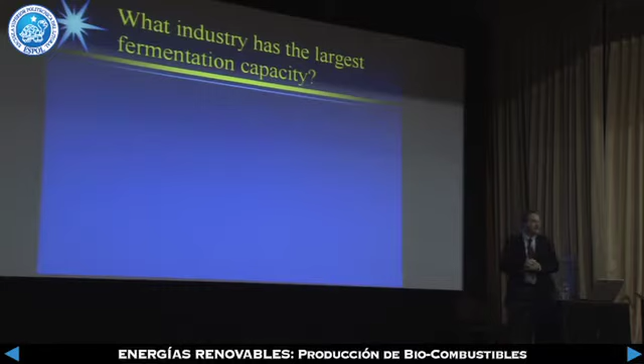What industry has the largest fermentation capacity? Is it pharmaceuticals, wine, beer, or wastewater treatment? Any ideas? Well, no, it's wastewater treatment. The beer has to go someplace, right? You have to process it someplace.

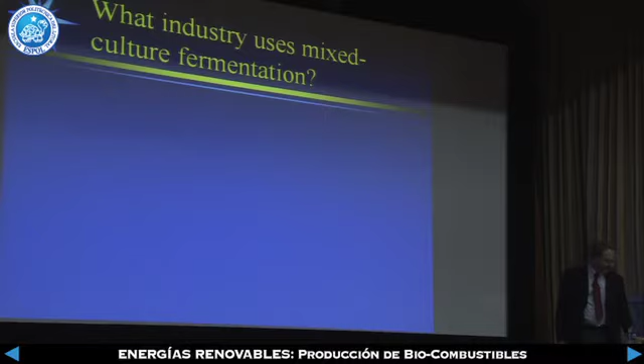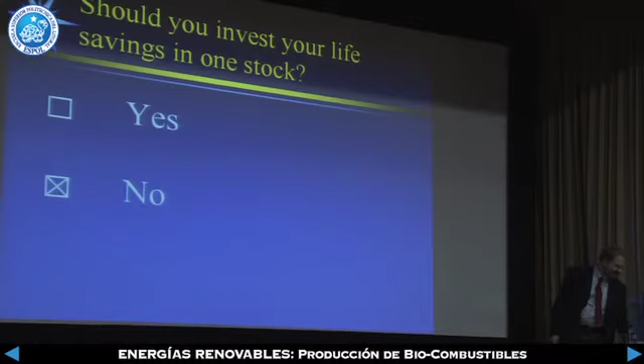Okay, what industry uses a mixed culture fermentation, meaning many organisms working together? Pharmaceuticals, wine, beer, or wastewater? Wastewater, very good. Would you employ a monoculture to treat waste, meaning a single organism? No. Should farmers employ monocropping, meaning they grow only one crop? No, that's not good. And should you invest all your life savings in a single stock? That doesn't sound like a good idea, right? So the conclusion from this test is that diversity is a good thing.

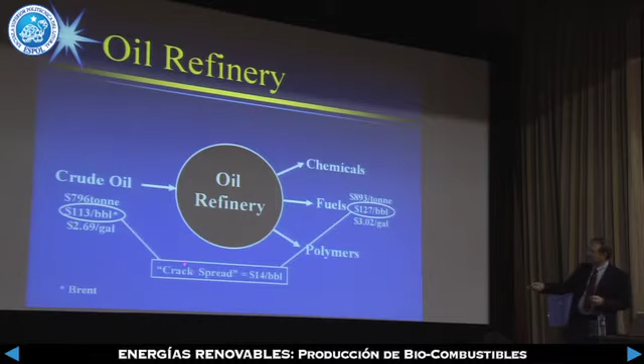So what I'm going to do is start by teaching you about how crude oil is processed into refined products. The cost of crude oil currently is about $113 per barrel, and refined products are about $127 per barrel. And the difference in price is the crack spread, which is only about $14 per barrel.

Now, if we have biomass at $60 a ton, on an energy basis, that's equivalent to oil at $20 a barrel, and the refined products would, of course, have the same value. So now we have a crack spread of about $107. So there's an opportunity to make money here if you can figure out what process goes into that circle.

So I'm going to give you a mini course on biofuels. There are 4 different feedstocks that people consider, and there are a number of liquid fuels that can be produced. And always you have to go through an intermediate. It's impossible to go directly from the biomass to the liquid fuel in a single step. And we have some processes that are chemical in nature and some that are biological in nature.

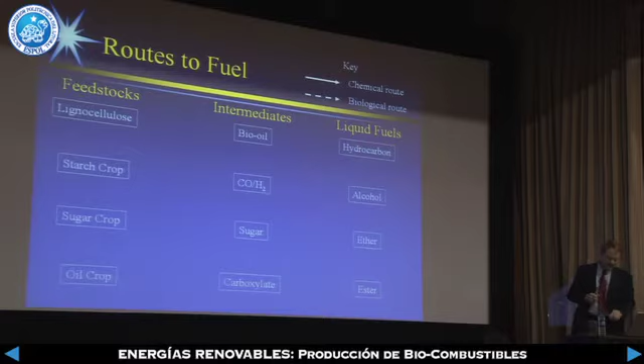So let's start something that could be done in Ecuador. We would extract the oil from oil crops such as palm and react that with methanol to make the ester that's commonly called biodiesel.

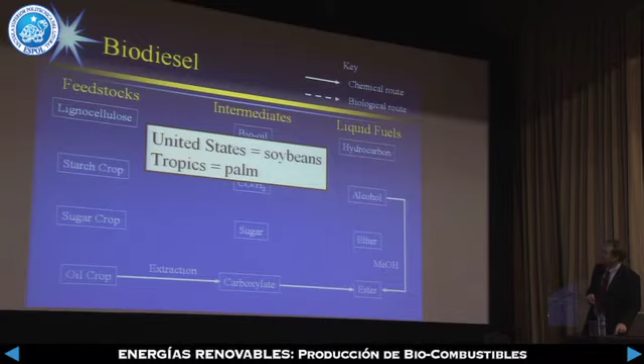In Brazil, they take sugar cane and extract the sugar, which is fermented to make ethanol. In the United States, we use corn to convert that to sugar and ferment that to alcohol.

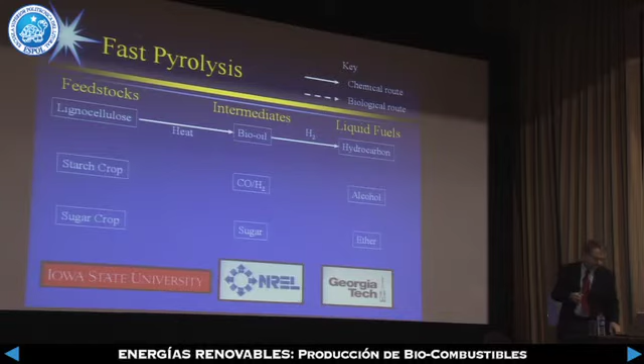And we could also heat the biomass very rapidly to make a bio-oil, which is then hydrogenated and upgraded to hydrocarbon. Or we could partially burn the biomass to make synthesis gas, carbon monoxide and hydrogen, which can then be catalytically transformed into various liquid fuels.

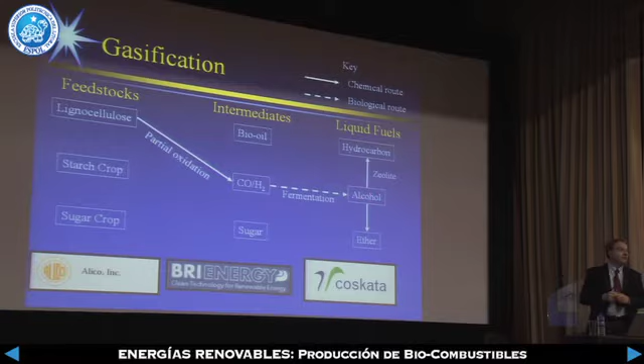Or we can ferment carbon monoxide and hydrogen to alcohol. Believe it or not, there are microorganisms that will eat carbon monoxide and hydrogen.

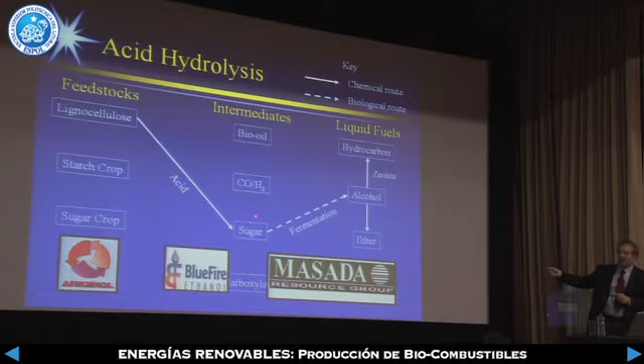If you take acids and treat lignocellulose with acid, you make sugar, and the sugar can be fermented into alcohol, or we can use enzymes that transform the biomass into sugar and ferment that. Many companies are pursuing that technology.

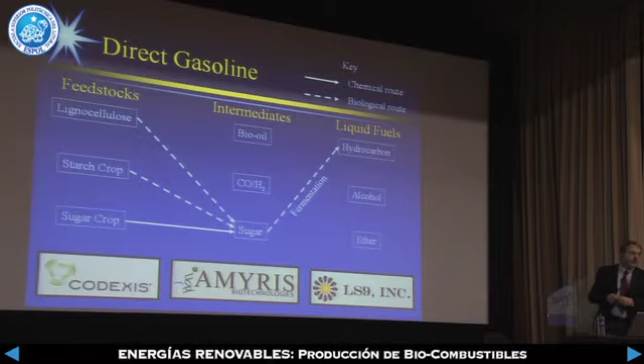Or you can directly convert the sugar into hydrocarbons. These companies believe that they can do that. Or there are chemical routes to transform sugar into hydrocarbons.

Now, the technology that we are employing is to take the lignocellulose using a mixed acid fermentation, make carboxylates, and then from there we use chemistry to make a variety of products.

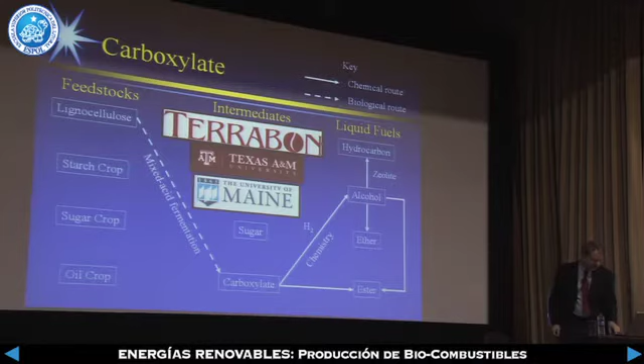Now, all these various feedstocks, the only one that has enough quantity to be of interest is lignocellulose. And the two most common platforms are the thermochemical platform, where you make synthesis gas, and the sugar platform, where you transform the biomass into sugar.

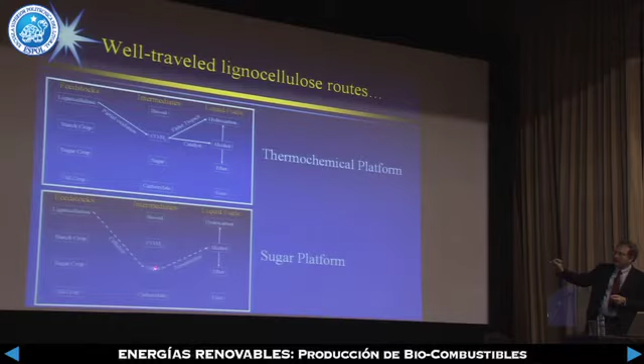Our technology is a road less traveled. We are essentially the only research group in the entire world that is pursuing this technology.

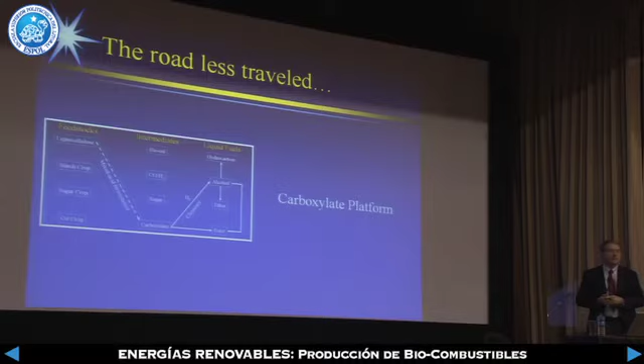So what I would like to do is compare these three different possibilities using a common basis. I'm going to create something called balanced biomass, which is about 68% sugars and 32% lignin. Lignin is the glue that holds biomass together.

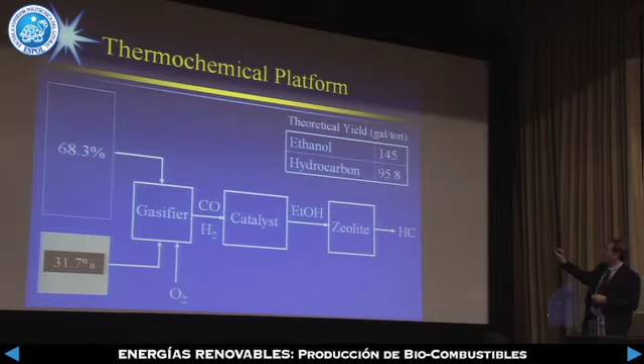So if we use the thermochemical route, both the sugar and the lignin are reacted with oxygen to make synthesis gas, and then we can catalytically transform that into alcohol or hydrocarbons. Here you see the theoretical yield.

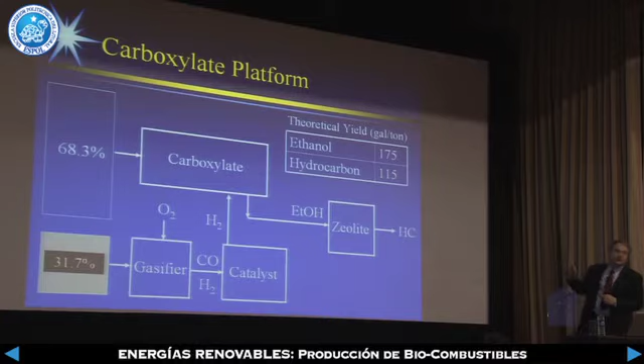So if we compare these theoretical yields, you see that the thermochemical platform has lower yields, whereas the two biological routes have higher yields. The reason the thermochemical is lower is because you are partially burning the biomass. The sugars are burned, so you don't have as much energy available to make into liquid fuels.

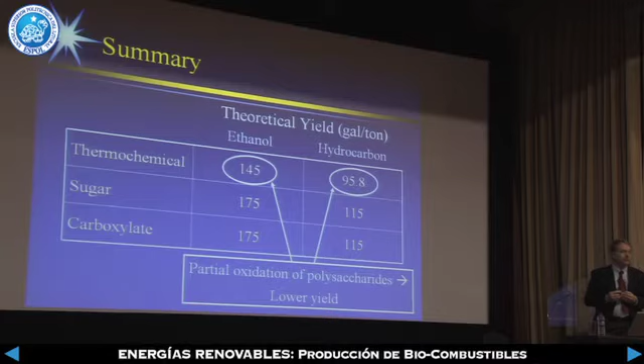If we look at the catalytic step in the thermochemical platform, they're trying to transform synthesis gas into liquids, which is very difficult. If you try to transform synthesis gas into hydrogen, that's done in every oil refinery in the world—it's a very easy technology. That's called the shift process, and that's what we're trying to employ in our process.

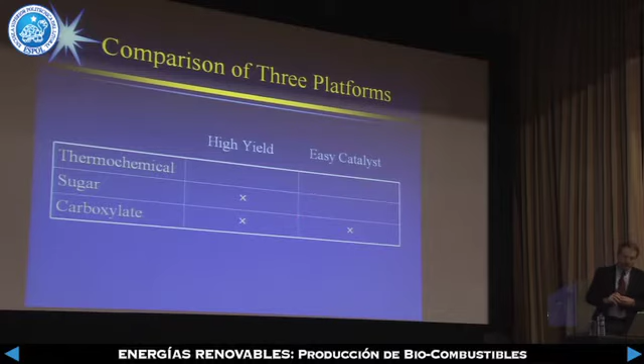So if we complete our comparison, in my opinion, the thermochemical route has no advantages. The sugar platform has one advantage, but the carboxylate platform has two advantages. For this reason, I think it is worth further investigation. In fact, I have devoted my academic career to understanding and moving this technology forward.

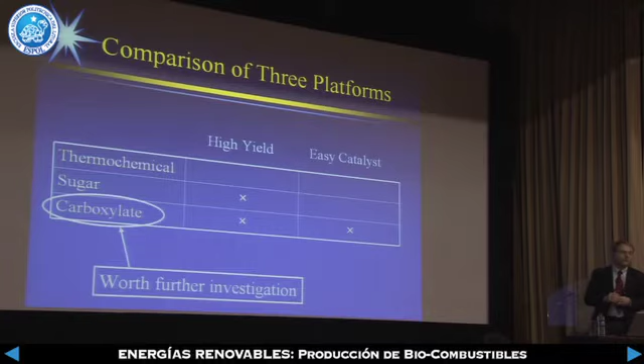So with that as background, finally the title of my presentation: I'm going to introduce you to the Mixalco process, which is the embodiment of the carboxylate platform.

The first thing we do is take the biomass and treat it with lime. Here I have to tell a little story. Some years ago, I had the opportunity to speak in Mexico, and it was a similar situation where we had a translator translating into Spanish. But the translator was not technical, so when I talked about treating biomass with lime, she translated it as 'limón.' The group laughed—I believe the proper word is 'cal.' So I'm sure you know the proper word is cal.

So we treat the biomass with cal and directly ferment the biomass into carboxylate salts. We then remove the water and transform the salts into ketones by heat. We hydrogenate the ketones to make alcohols, and then we transform the alcohols into hydrocarbon fuels.

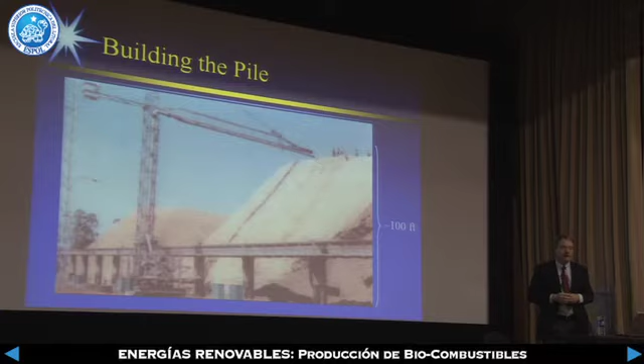So this is a photograph from Argentina. This is sugarcane bagasse in a pile, and you can see people on top—we're estimating that to be about 100 feet, or 30 meters, in height. The way they build that pile is with an aqueous slurry of the biomass and water; the liquid drains away and the solids accumulate and build the pile.

Now the important thing is to remove the lignin. What I'm showing is the lignin content on this axis and time on this axis. In some cases there was no air; in others we did have air, and we varied the temperature. Bagasse has about 24% lignin, and in just a matter of a few days it dropped to about 17%, then nothing more happens. But in the presence of air, the lignin content keeps dropping and dropping and dropping. In fact, we made paper from this material—it had such a low lignin content.

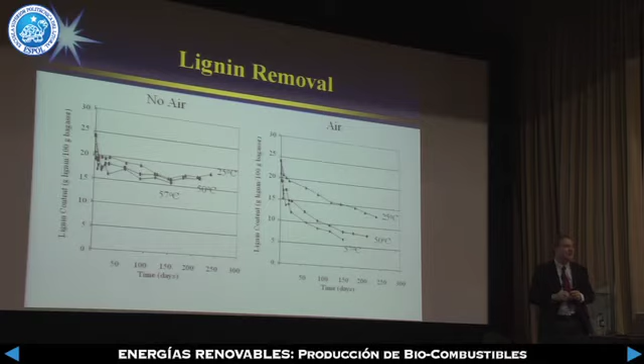Now, I'd like to brag about these data. They were generated by Cesar Granda, who's an Ecuadorian student that worked with me for many, many years. I will refer to Cesar multiple times through the presentation because he's played such an important role in my research.

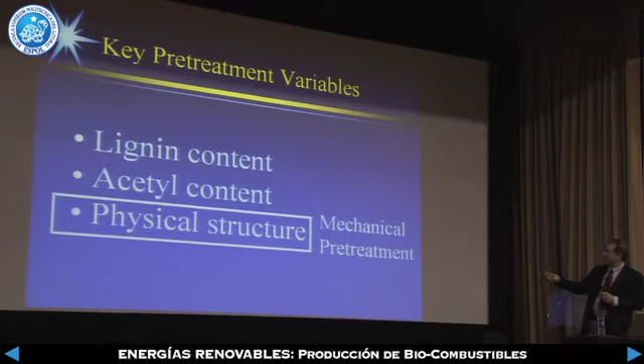The other issue we must deal with is the physical structure, which requires mechanical treatment. The classic way of doing this is with a ball mill. We have steel balls that tumble and rotate and pound against the biomass, making it very digestible.

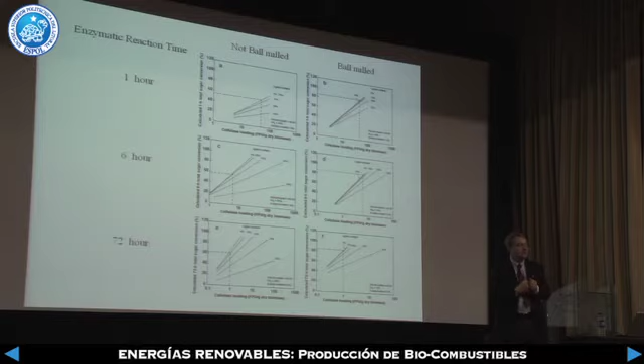What I'm showing here is using enzymes to break down the biomass. All this data is without ball milling, and all this data is with ball milling. We're looking at how much sugar can you make in 1 hour, 6 hours, and 72 hours, and this is the amount of enzyme being added. So if there's no ball milling, I can achieve 55% digestion, but with ball milling I achieve 85%. We see that same pattern: in 6 hours I can get to 55%, 85%, 60%, 85%. So the mechanical treatment greatly increases the digestibility of the biomass.

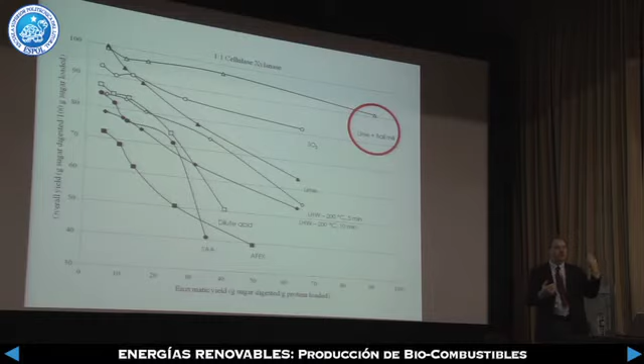What I'm showing here is on this axis, how much sugar you get per unit of sugar in the biomass, and on this axis, how much sugar you get per unit of protein added. The enzymes are made of protein, and they're very expensive. So we want the highest yield of sugar per unit of biomass and the highest yield per unit of protein, which means you want to be in this region. Each of these represents various pretreatments that have been explored, and the one that works best is the combination of lime plus ball milling. So this shows how effective the combination of a chemical and mechanical treatment is.

There's a problem, though. Ball milling is very expensive. Just the electricity required to run the ball mill will cost you $430 per ton of biomass.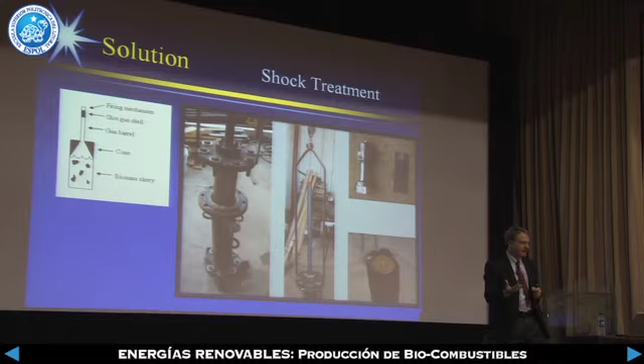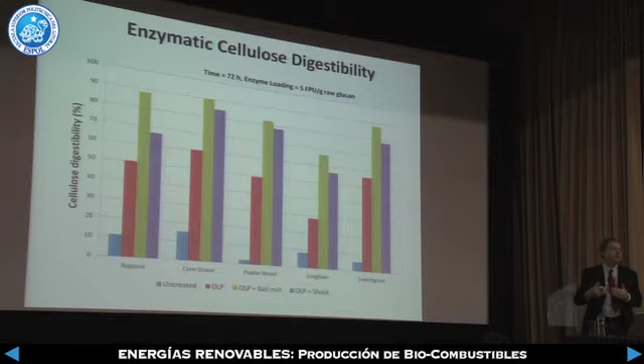Here I'm showing 5 different kinds of biomass. On the left is untreated material. The red is oxidative lime pretreatment, just lime and air. This is the ball milling, and then this is the shock. What you see is that the shock treatment does the best, better than ball milling in a 24-hour period. Now, when we go to 72 hours, the ball milling is slightly better, but not dramatically better, and I certainly cannot afford to pay $400 per ton just for that little bit of improvement.

These data I find are very, very exciting, and let me see if I can explain what's going on here. This is the rumen of a cow, the first stomach of a cow. Shown on this axis is the amount of digestion, and on this axis is the amount of time. Now, in the United States, we feed cattle corn to fatten them up before we eat them, and this is how well corn does in the rumen. Notice in 24 hours, it's about 80% digested, and that's why cattle like to eat corn. It's very digestible; they can gain a lot of weight.

Another thing we feed cattle is alfalfa, a grass with high protein content, and in 24 hours it's about 55% digested, so it's very digestible. Now, if you feed cattle corn stover — every part of the corn plant but not the grain, so the leaves, stems, husk, and cob — you see in 24 hours it's only about 30% digested. However, if we shock and lime treat the corn stover, in 24 hours it's about 65% digested. So it's more digestible than the alfalfa, which is very expensive, and almost as digestible as the corn grain, which is also very expensive. So we can take a waste material, corn stover, that has very little value, and by going through this process, make it almost as valuable as the corn grain itself.

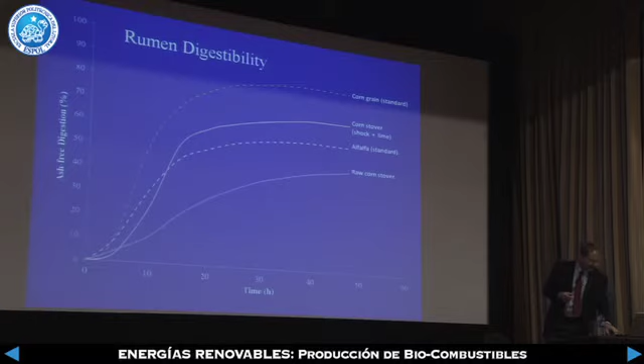Okay, let's talk about the fermentation. Essentially what I'm trying to do is make a giant cow — I want to make the rumen of the cow grande.

So these are places where organic acids form. I've talked about the rumen, sewage digesters, swamps, and termite guts.

Now, why does nature favor organic acids? If glucose, the sugar in the biomass, is converted to ethanol, the Gibbs free energy is about 48 kilocalories per mole. But if you transform the glucose into acetic acid or vinegar, the Gibbs energy change is 62 kilocalories per mole. So these organisms want as much energy as they can from the biomass.

Now this is a little bit simplistic. In addition to acetic, propionic, and butyric acid, you can get some methane and some hydrogen. For our purposes, methane is not a desired product, so we put an inhibitor there that suppresses the methane formation.

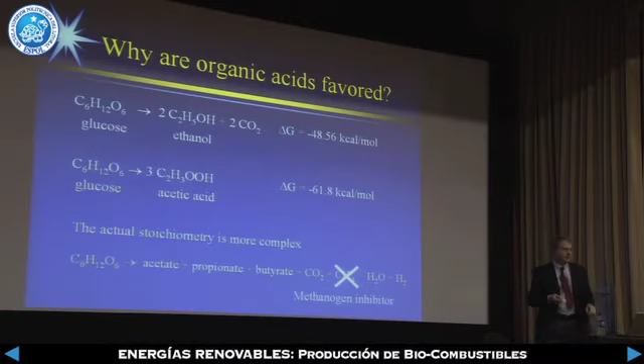This shows the composition of the acids at 2 different temperatures. 40 degrees Celsius is the temperature of a cow, and 55 is the thermophilic condition. Notice that at 40 degrees, it's only about 41% acetic acid, but you get these higher molecular weight acids. When you go to elevated temperatures, you eliminate the higher acids and emphasize the acetic acid.

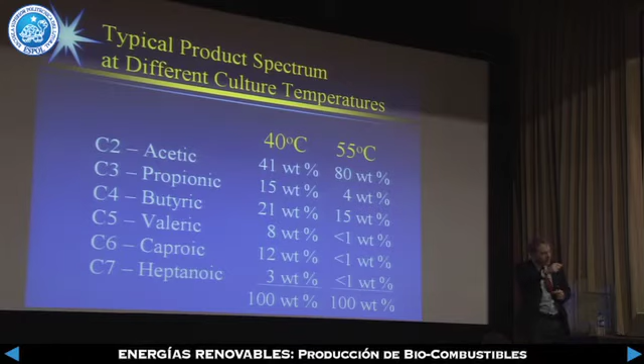So this is a very simple control variable that you can use to adjust the spectrum of acids that you get from your fermentation. So if you're trying to make acetic acid, which is a valuable chemical, you could operate at elevated temperatures. If you're trying to make fuels where these are more valuable, then you lower the temperature. So you can adjust the fermentation to give you the product spectrum that you're looking for.

Next, we'll talk about the dewatering step. This is my favorite way to do the dewatering. We have the salt solution, the fermentation broth, coming into a heat exchanger. On this side of the heat exchanger, we have boiling brine water, the boiling salt water. And on this side, we have condensing steam.

So what happens is we bring the salt water in here. In this example, I'm going to use 100 degrees Celsius. The pressure is 1 atmosphere. We take that steam, which has no salt, bring it to a compressor where we elevate the pressure to 1.04 atmospheres. Now the steam will condense at 101 degrees. So this side is 101 degrees, this side is 100 degrees. Heat will flow from the hotter to the colder, and when it does, the steam condenses, comes off as liquid, and that heat then boils more water, and so we generate more steam.

So this energy is going around and around and around, and what drives that energy is the small amount of work that's invested in that compressor.

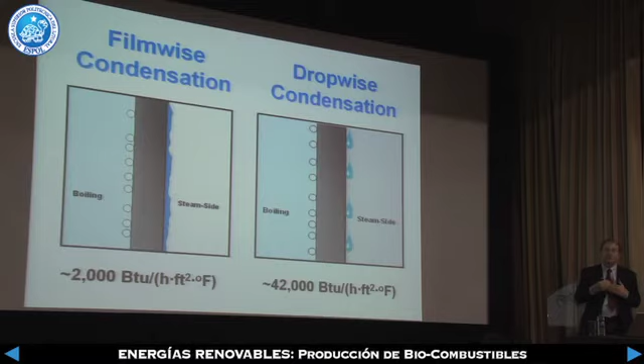This has an enormous impact on making this process very efficient.

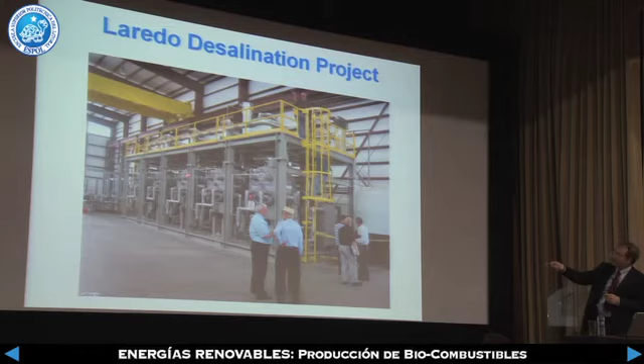We've actually piloted this technology. This is a water desalination facility for the city of Laredo, Texas. These are the heat exchangers right here, and up on the upper deck is the compressor, which is shown here. This machine can process 50,000 gallons of water per day. In fact, it could do about 5 times more than that. It has much more capacity than what we used.

Okay, now we have the salts. We're going to heat them to form ketones. And the chemistry is shown here. These are the salts, in this case calcium acetate, the propionate and butyrate. We heat them and to form acetone and calcium carbonate. So the calcium comes out in the form of calcium carbonate, and the organic molecules come out in the form of ketones, in this case acetone, diethyl ketone, and dipropyl ketone.

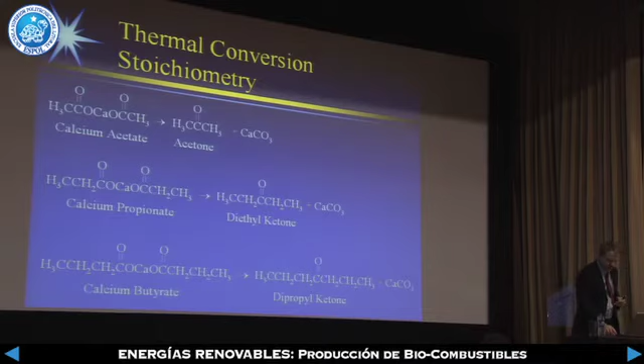I won't go into much detail here other than to say this is the reactor where we make the transformation of the salts into the ketones, which are collected here as a liquid.

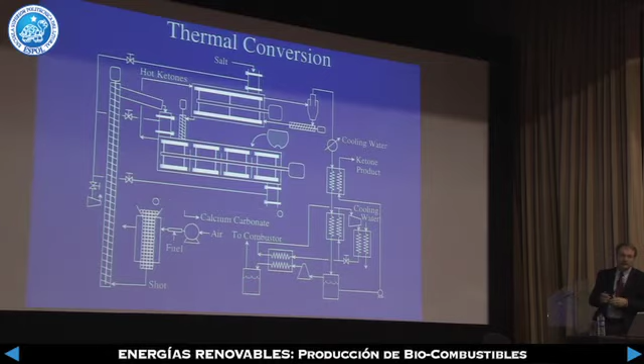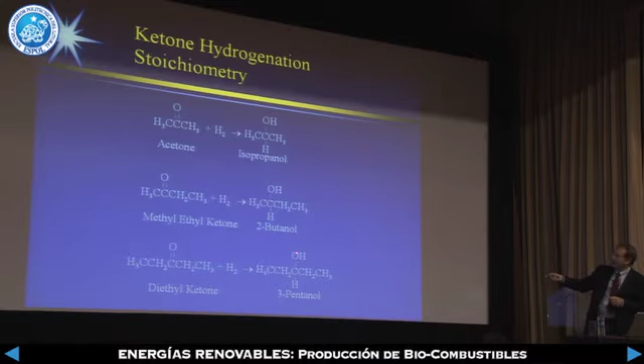Now that we have liquid ketones, we're going to add hydrogen to make alcohols. Here you see the chemistry: the ketone groups are hydrogenated to form alcohol groups. This can be done in a liquid phase using a Raney nickel catalyst, a very simple process. Our computer models propose that we do a 3-stage hydrogenation.

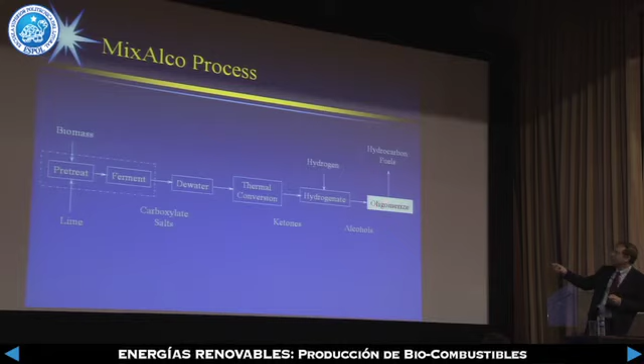Finally, after we have the alcohols, we go through a process called oligomerization to make hydrocarbon fuels. This chemistry is a little more complicated. The first step is to split out the water, which leaves a double bond. That double bond is very reactive, and it will react with other double bonds and grow, or oligomerize, into a larger molecule. So here we joined 2 3-carbon molecules to make 1 6-carbon molecule. If we want to, we can saturate that double bond by adding more hydrogen. So what I've done is taken an alcohol and made a hydrocarbon. In this case, that molecular weight would go into gasoline.

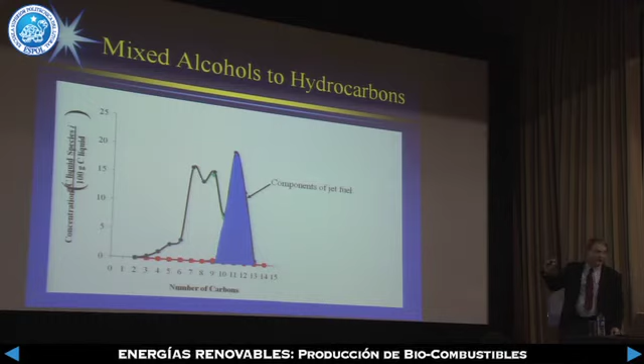This shows the composition of the hydrocarbons, the carbon number. These components here go into jet fuel, and these components go into gasoline.

What are the advantages of our technology? We can use wet feedstocks, so you can go directly from the field to the factory. We can use a wide range of feedstocks, and I'm going to spend a little time on this. Here I'm showing a tree going into our process, but there are many, many other things that can go into the process.

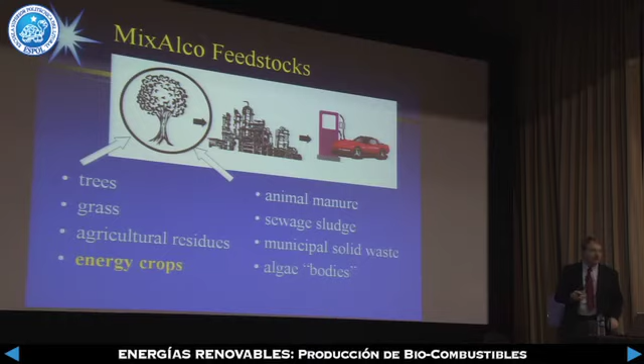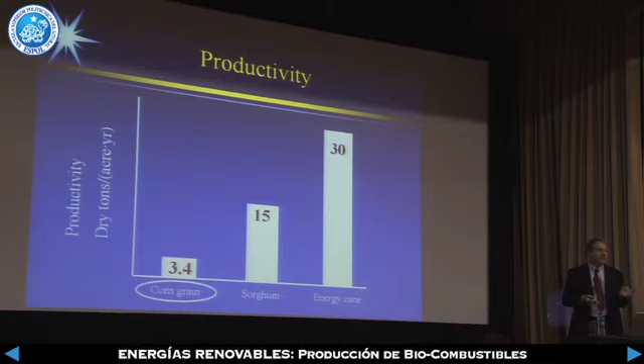Let me talk about energy crops. In the United States, we grow corn as an energy crop. You can see the yield in dry tons per acre per year. In the United States, we measure land by acres rather than hectares. It's about 2.5 times smaller than a hectare.

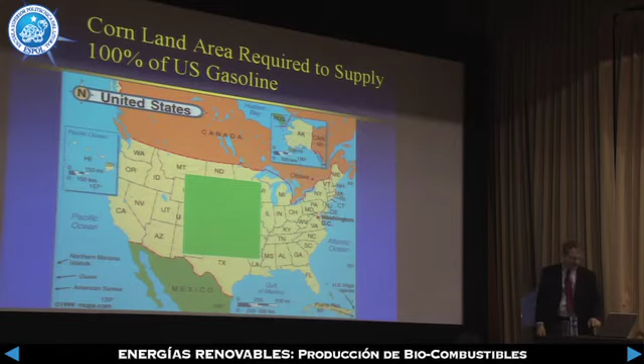So if the United States says we're going to replace all of US gasoline with corn, that amount of land would have to be planted. I don't think anybody here believes that's a practical solution to the fuel problems. Plus, we have a moral dilemma of food versus fuel.

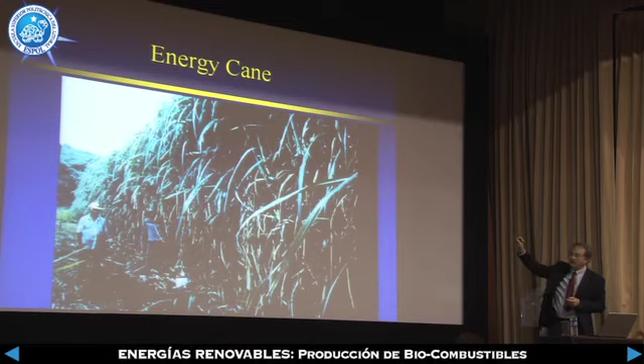Or we can use a crop called energy cane, which is even more productive. This is a photograph of energy cane taken in Puerto Rico. Here you see 2 adult males next to 1 year's growth. You can see it harvested here.

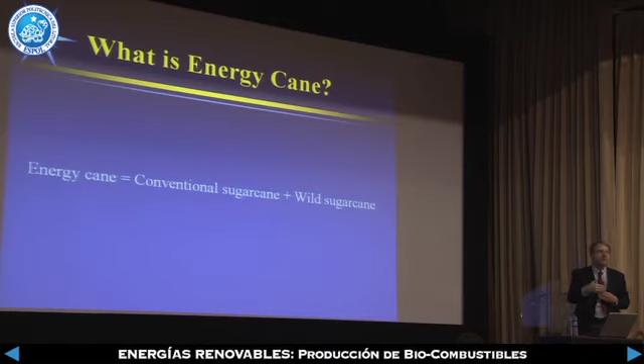Now, what is energy cane? It's a cross between conventional sugar cane and wild sugar cane. Conventional sugar cane is bred to have a high concentration of sugar, where wild sugar cane just wants to grow. So if you take the genes from both, you get a very productive crop that also makes sugar. Let me use this to illustrate that.

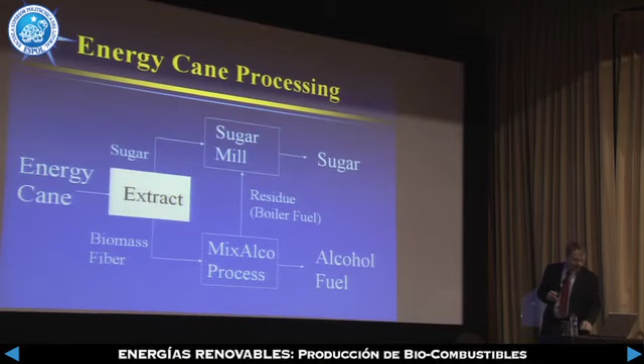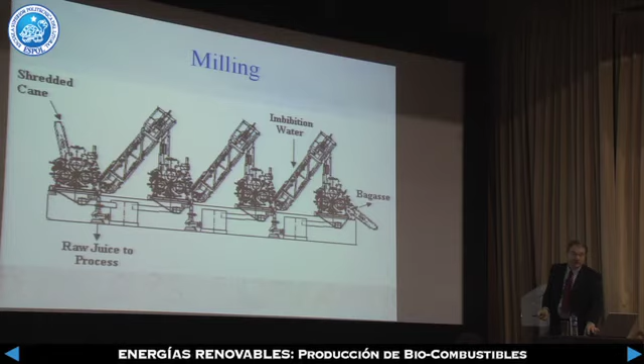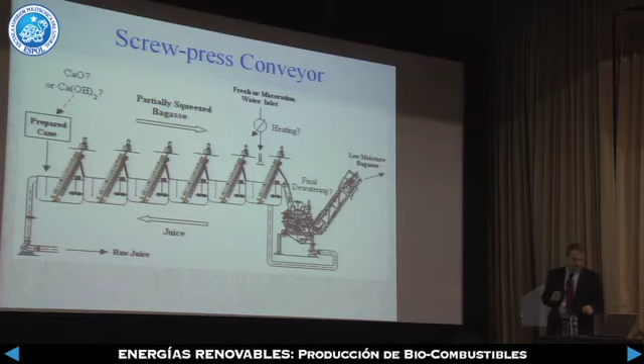What we're proposing is a screw press conveyor shown here between each of the stages. You bring the cane in, it goes this way, and the water that washes out the sugar goes the opposite direction. This shows the number of stages: for milling you need 4 to 5 stages, for diffusion about 18 stages, but the screw press conveyor is about 8, so it's in between.

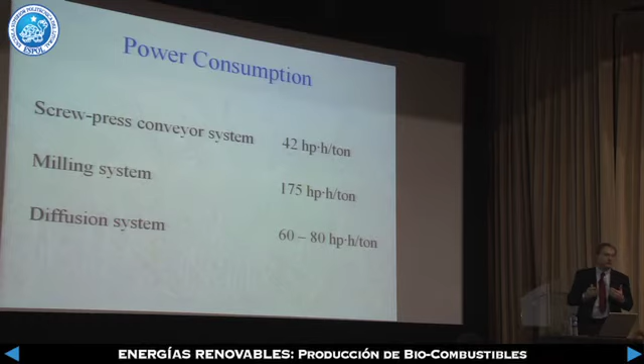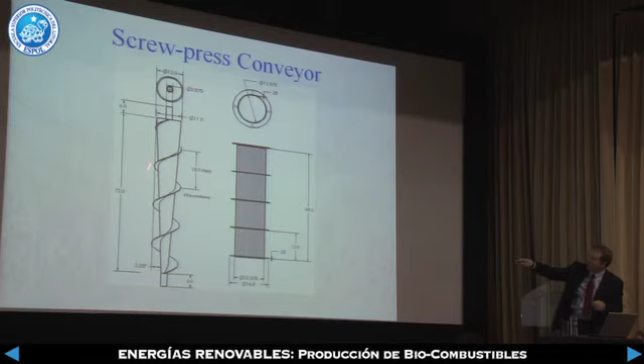The way the screw press conveyor works is you have a cone with these screws located on it. This is a cylinder perforated on the outside, with lots of holes. We take the cone and put it inside the cylinder. So here's the cone inserted in the cylinder, and again you see there's lots of holes. As the biomass goes up through the cylinder, the water comes out through the sides.

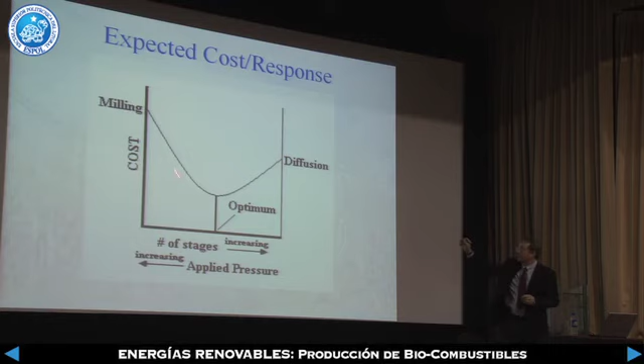If the value of that is $3 a gallon, it would be about $750 million, representing about 0.5% of your gross domestic product. So simply by switching from conventional cane to energy cane on the land you already have, you'd add almost $1 billion to your GDP, and you'd actually have more sugar than you're currently producing from the same amount of land. So everybody wins. Nobody takes a loss in that possibility.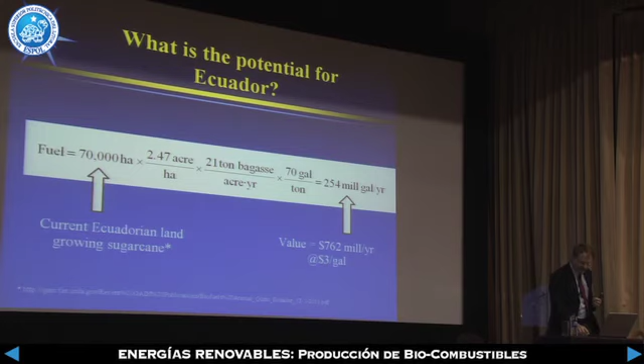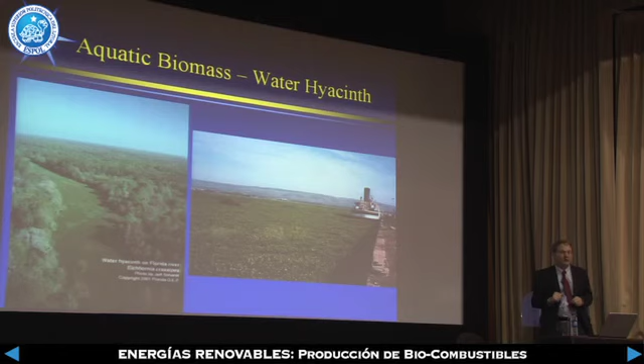If we go with aquatic plants, such as water hyacinth, notice the potential yield is much higher. If you're unfamiliar with water hyacinth, these are some photographs. It's a beautiful plant in bloom, it floats on the surface of water, and it actually clogs waterways. Yesterday, when I took the helicopter ride to the hydroelectric plant, we saw many, many hectares of water hyacinth growing in the lakes, and it makes transportation difficult.

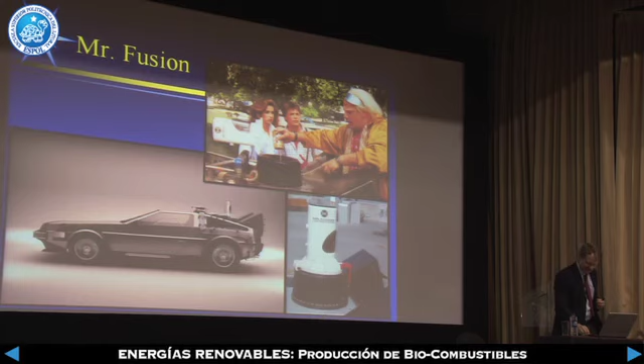We do not require genetically modified organisms, and there are many products that can be made, either from the salt of the acid or the acids themselves. Each of these arrows represents a chemical route to these products. Now, these products here are hydrocarbons that we currently use as fuels, but there are many other products that can be made that have value as industrial chemicals and solvents.

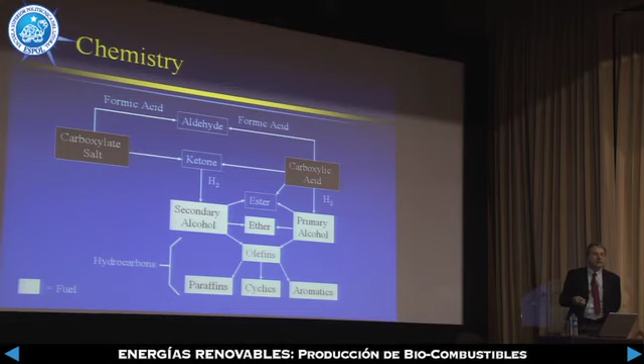An important point is we do not require the addition of enzymes. Our mixed culture of organisms make their own enzymes for free. And we do not require sterility, which has an enormous benefit to the economics of the process.

So speaking of economics, I have to give this disclaimer. Basically, the company that we're working with, Terrabon, says they have their own perspective on the economics. I, as an academic, have my perspective on the economics. They're two separate ideas. To be a little clear about that, Terrabon is interested in building the first plant, and I'm interested in what's called the nth plant. As this is a mature technology, what does it look like? So they're two different perspectives.

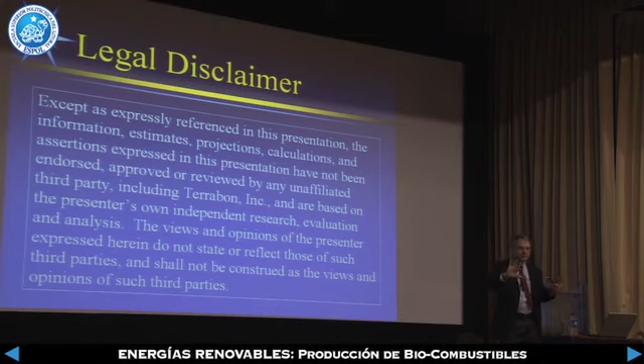So our perspective on the economics is shown here. On this axis, we have the plant capacity in tons per hour. On this axis, we have the selling price of the hydrocarbon fuel, including profit and return on investment. Each of these lines represents a different feedstock cost, ranging from negative $60 a ton, which you would get for accepting municipal solid waste as a feedstock, to as much as $120 a ton that you would pay the farmer. Now, what I've been using as my reference is $60 a ton, which is this line right here. You see there's a shoulder, roughly 100 tons per hour. Going much larger than that doesn't buy you a whole lot, but going smaller than that is very expensive. So that's kind of a reference point where you'd like to be.

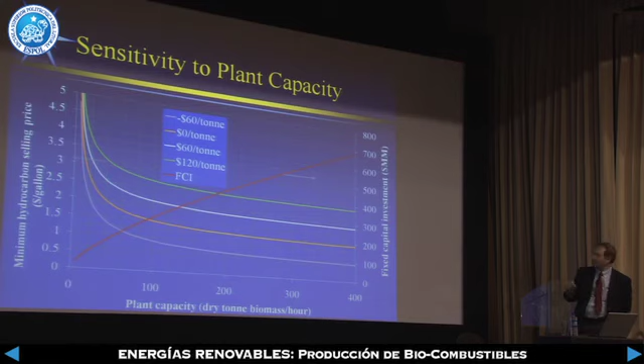This red line here shows the capital cost of the plant in millions of dollars. Now, at that reference point, if we go to a large plant, we're estimating about $1.76 per gallon would be the selling price of the hydrocarbon fuels, which corresponds to crude oil at $63 a barrel. So as long as crude oil is more than $63 a barrel, our technology is the cheaper way to make hydrocarbon fuels.

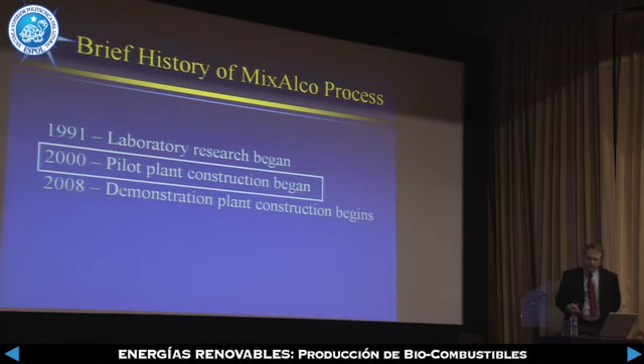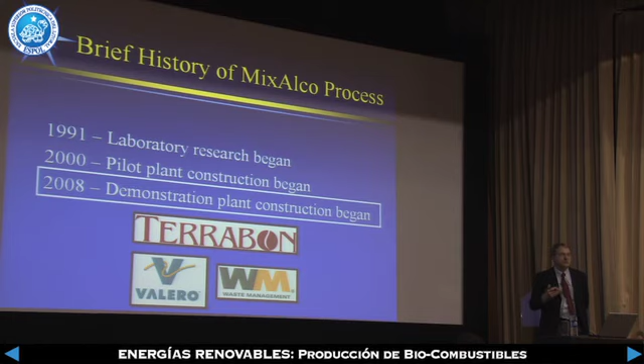Some history on our technology. I began researching this over 20 years ago in 1991. In the year 2000, we started building a pilot plant, which is shown here. It's located on campus. In 2008, our industrial partner, Terrabon, started building a demonstration plant in cooperation with partners Valero, which is a very large oil refining company in the United States, and Waste Management, which is the largest garbage hauler in the United States.

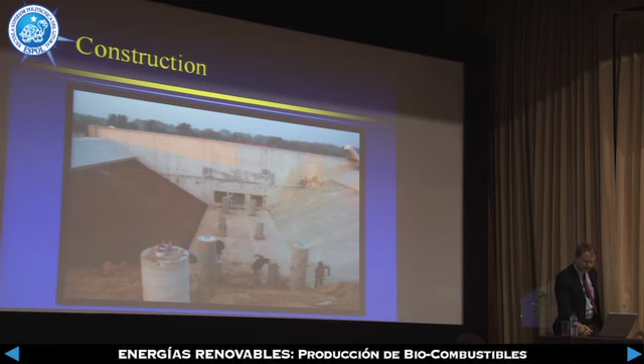So this is my third reference to Cesar Granda. He's the engineer that drew the first drawing of the fermenter. It's a pit lined with concrete and covered with fabric. So here is the pit being dug, and it's being lined with concrete. And these are the tanks that store the fermentation broth. There are 4 of them, and here you see the tanks next to the pit.

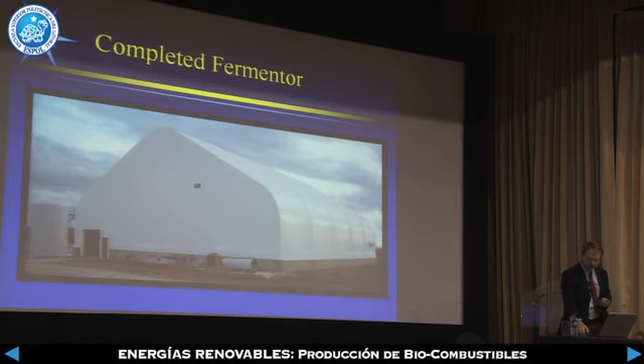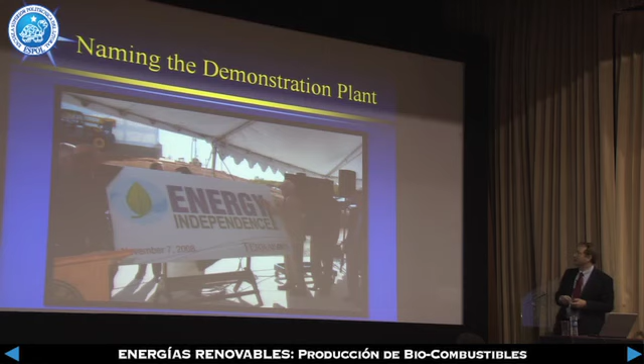Because we're trying to make a giant cow. We had a dedication ceremony where Governor Perry was there to help us celebrate, and I got to speak there as well. These are the people that founded Terrabon, Emil Ogden and David Carrabba. Here's the Holtzapple family posing with the governor. I had the opportunity to bring the governor inside the fermenter, explaining how everything works. And here's my son, John, looking into the future.

Okay, so some conclusions. There are no scientific breakthroughs required. We simply have to scale it up. The engineering is all that's required. It's commercially ready and economical.

Okay, so we have a pre-test, we have to have a post-test. Should we encourage diverse approaches to biomass conversion? And I hope you'll agree that the answer is yes.

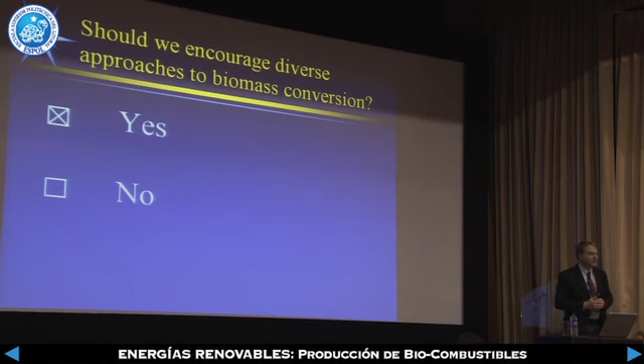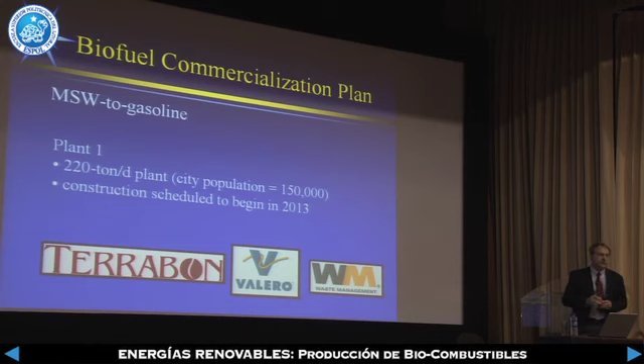And the question some people ask is, what's the next step? Where do we go from here? Well, Terrabon wants to take municipal solid waste and make it into gasoline. The first plant would be roughly 200 to 300 tons per day, which is the waste from a city of about 150 to 200,000 people. And they're planning to begin construction in 2013, next year.

Through DARPA, which is the Defense Research Agency that brought you GPS positioning and the internet, they also have funded our work. I hope that will become equally as valuable. In phase one, it was a $20 million project. The goal was to make a pilot plant scale process that produces 100 liters of jet fuel.

We were successful with that, and so we moved to phase two, which is a $17 million project, which at the demonstration scale plans to make 6,000 liters of jet fuel. Our goal is to accomplish that this fall. And then next year, the plan is to go to phase three, which is to build a commercial plant.

Now, during phase one, there were 21 organizations, each pursuing their own favorite biofuel technology. Remember at the beginning, I gave you all the different possibilities. In order to continue with the funding, every 3 months, you had to produce 2 liters of jet fuel. And all of those organizations were unable to meet that milestone except for the carboxylate platform. We were the only ones that successfully met the milestones and produced the 100 liters of jet fuel.

So when we passed to phase two, DARPA did not want to put all of its eggs in one basket. They had 2 companies that started, but you still had to meet the milestones. Very quickly, the other company was unable to meet the milestones, and again, Terrabon is the only one to survive. They are the only ones tasked with making the 6,000 liters of jet fuel.

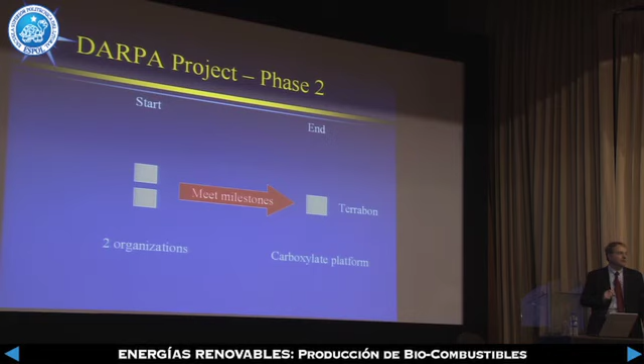So this gasoline would be indistinguishable from the gasoline that you're already using in your car. When the exhaust comes out the tailpipe, it has carbon dioxide. Then through the process of photosynthesis, we fix that carbon dioxide and make more plants. So what we have now is a cycle where the carbon just goes around and around and around.

Now we are using, in this example, natural gas, which does release CO2. If you don't care about global warming, you just let it go into the atmosphere. If you do care about global warming, then you take that CO2 and put it under the ground. So what I'm proposing here is a process where we can actually use abundant fossil fuel reserves and still address global warming.